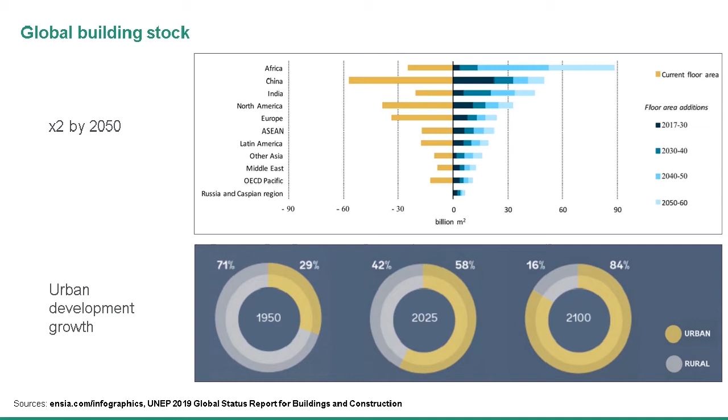Right now, about 52% of the world's population reside in urban areas, and towards the end of the century, over 80% of people would be in urban areas. In this same report, they found that this sector of building and construction accounts for about 40% of global CO2 emissions, and it also accounts for almost 40% of all of the energy consumed annually.

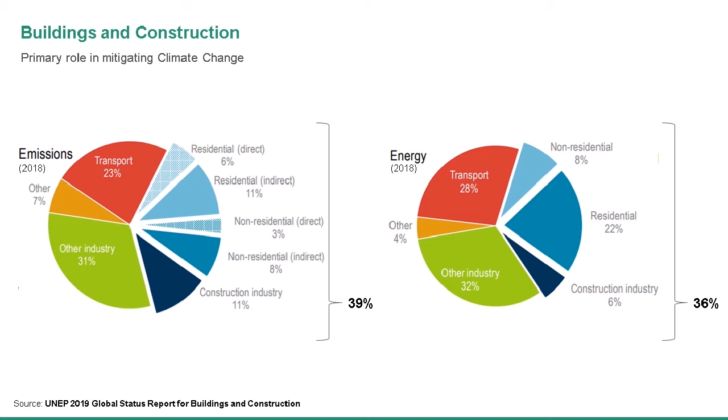Now this is a key point for us. Because of the pivotal role that we play in this sector, we have the unique opportunity to be the catalyst for positive change towards achieving sustainability once we account for all of these things. And what can we actually do about it?

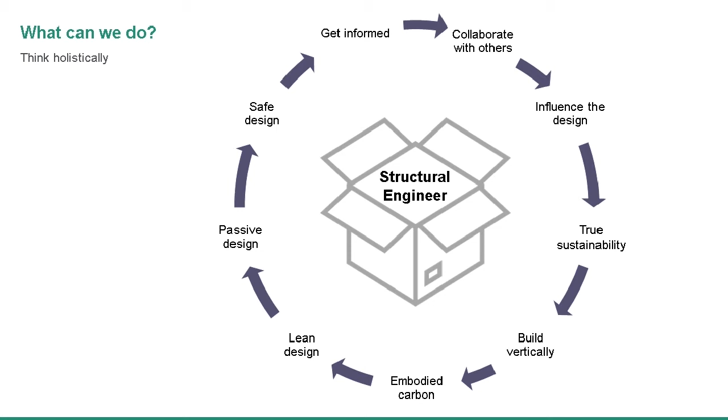So there are a few things that we should be doing. A lot of the presenters in our conference spoke about many of these things, and I'll just highlight a few others. The first is thinking holistically. We need to step out of the structural engineering box, or at least open the lid. We need to consider other factors and incorporate all of these into our thought processes.

First is designing for the future. This is a meme that I got from a friend of mine earlier in September, and it says, if you're not in the path of a hurricane, one will be assigned to you shortly. The image below is a satellite image of the Atlantic region from the National Hurricane Center that showed all of the active tropical systems, storms, and hurricanes across the Atlantic at that given point in time.

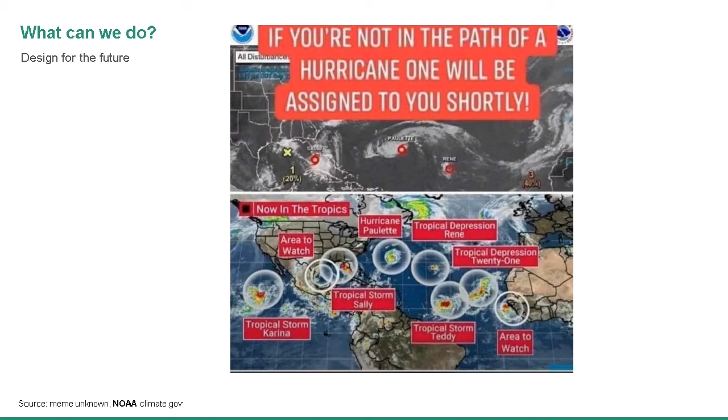What we're finding is that possibly because of increasing ocean temperatures, we may see more and more of this being the norm. This is the second time in history that we've exceeded the named hurricanes for the Atlantic, and so we're now into Greek letters.

So this type of failure is something that should not happen. We should design structures so that they don't fail. And I don't mean over-designing structures, but more careful thought and analysis into what sort of loads the structure would actually be sustaining. Because of climate change, as you get closer to the equator, you'll have an increase in design wind speeds. So account for that in designs and in retrofits of structures.

And then also try to adapt your designs towards the actual impact of climate change. What do I mean by that? Consider, for example, a critical facility like a hospital that's located in an area that's now going to be a potential floodplain for some times of the year due to increased precipitation or rise in sea levels. So let's say you don't utilize the ground floor level for operational space.

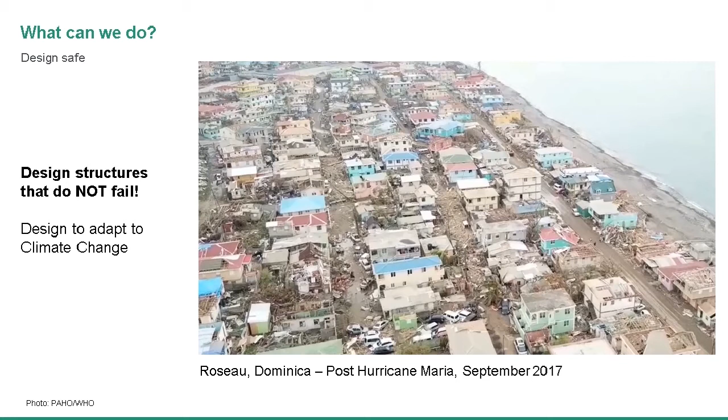Use it for parking in normal times. And then consider that you have ramps that you can access the facility from first floor level upwards, and that facility can remain off-grid and functional for a period of 5 to 10 days, for example, so you can continue to provide essential services. That's a type of thinking that we need to adjust to in order to meet sustainability needs. Then the other thing is passive designs.

Now, some people also spoke about natural lighting. It's incorporating all of the natural elements we have around us, and many of you may already be using it partially in your designs. I'd like to bring it more to the forefront of your conceptual design process. So think about natural lighting, natural ventilation, the thermal mass of building properties, and how you can reuse, recycle, or harvest rainwater. By doing that, you're less reliant on man-made products, and you become more sustainable because you're not taking more resources out of the environment.

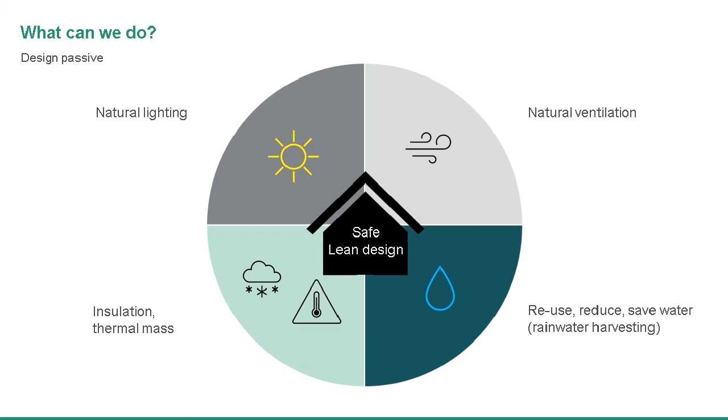A simple illustration: say you were to consider the balance between natural lighting and the heating or cooling load of a structure. Scenario one is where you have a room, say a conference room, that has no windows. You can artificially light the space. And all of us already thinking, well, that's not very green because it's very carbon intensive for the operational load.

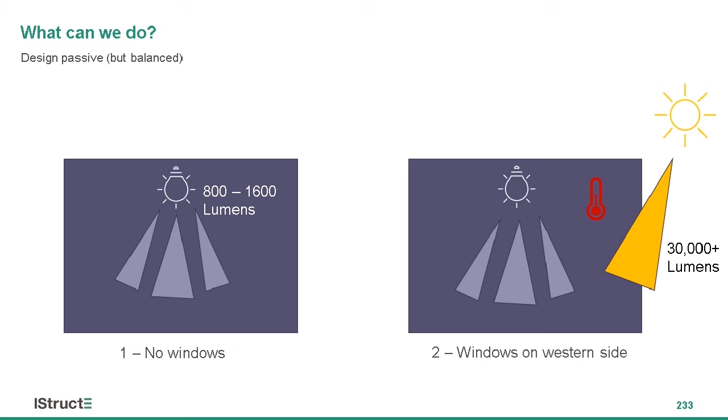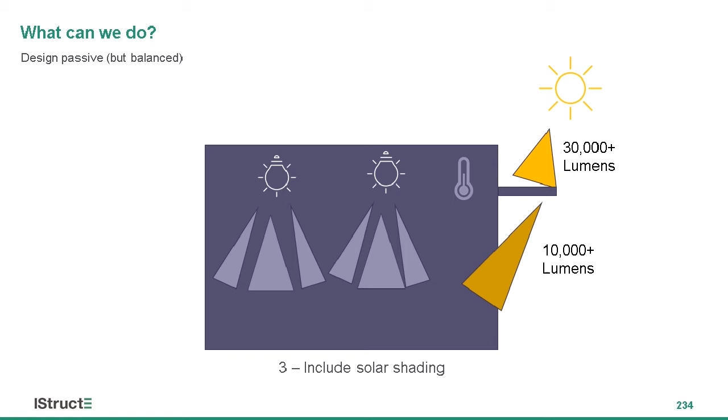Then you can introduce windows or full height glazing, say on the western face of the building or on the roof, like we saw from Steve's slide. But that then tends to bring a lot of solar radiation on the structure, and then cooling loads become a problem, especially with increasing temperatures. What we can then do is incorporate passive solar shading elements. So you're reducing direct solar radiation onto the structure. You still get the benefit of ambient lighting, and you have a reduced cooling load. So it's a more optimal design.

The other aspect I want to raise is how can we use land space more efficiently? I did a couple pro and con points comparing suburban low-rise spreads, say single or two-story structures for residential development, versus medium-rise, 10 stories or less, in an urban development. The suburban spread would utilize considerably more land space. And the Food and Agriculture Organization of the UN has made a direct correlation between increasing global population and reducing arable land space. Now, food security is already a problem for many countries, and with this increase in population that we're expecting to see, this problem is going to be exacerbated.

So by us as structural engineers influencing our clients to utilize less land, we'd be helping to alleviate this potential problem. The other thing is, from studies of healthy cities, it was found that people who live in urban environments tend to be healthier than people who lived in the suburbs. Why? Because from urban environments, you tend to walk more. You can leave your apartment complex, walk to work, cycle, take public transportation, access amenities around you. If you're in the suburbs, you tend to jump into your private vehicle to get to your office or otherwise. So this is another big consideration.

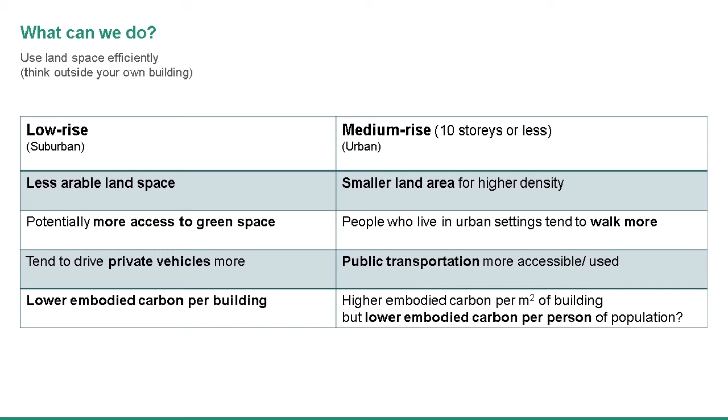And I think one of the other trends we need to probably switch to is considering the overall embodied carbon in an urban medium-rise development versus, say, suburban or individual houses. Because yes, the single or two-story structure would have less embodied carbon. However, if you were to house more people in an urban development, your infrastructure towards that space is also probably a lot less. So your total embodied carbon for that development, or the embodied carbon per person, would be a lot less than the suburban spread.

And then the concept of true sustainability. Speaking from a developing country perspective, we need to start building simply. We're probably doing that already, but if you're proposing solutions in countries like Africa, the Caribbean where I am, or Latin America, don't propose solutions with bespoke materials and connections that are only going to be used for your project.

Consider projects that can be done utilizing local labor and have the transfer of knowledge, so you have the spread of sustainability. You want to be able to replicate your sustainable solutions so that the communities can use it after your project ends. And then also consider ease of maintenance.

We tend to have a systemic problem of lack of planned preventative maintenance. This is where you should use materials that are more durable. You should consider if you have local capacity to execute planned preventive maintenance, and make it as simple as possible. Because the photo you saw with the damage in Dominica, a lot of that can be attributed to lack of maintenance in many of those buildings.

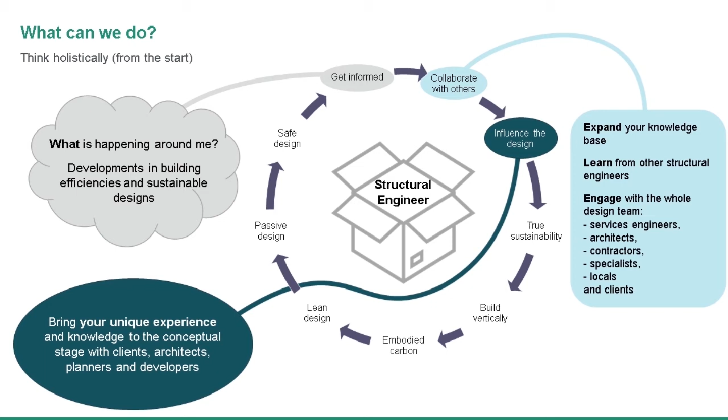And then use all of this knowledge and experience. Use your critical thinking and your creative mind, and influence clients early on in the project. This can actually change the future of sustainability. In order for us to achieve something different, we need to start doing differently.

Thank you, Shalini. Yeah, absolutely brilliant. A completely different point of view again. Shalini's clearly not just a structural engineer, but very much in the position of having to be a multidisciplinary designer all of the time, and therefore a multidisciplinary influencer.

And I think there's so much we can all take away from that on projects small and large. Don't be afraid to ask the question, even if you have to preempt it by saying, of course it's not my discipline, but why have you put the windows on this side, for example? And I really like the point about questioning and understanding where you're working.

For those of us who work internationally, and many of us maybe are based in one country but working in others, how well do you understand the sustainability drivers in the country where you're working? Are they the same or different to at home? Is denser better, or is lower better? How deeply have you thought about it?

And I've got to say, if there's one takeaway message for me from those slides, it was to do with the slides on population growth and building growth. It really hit home for me just then that those of us who live and work in the so-called developed world have very little need for more buildings.

Most of the world's growth in population does not occur in countries like the one where I'm sitting right now, and therefore if we've only got a certain carbon budget around the world, then I think we need to talk internationally about who should be allowed access to using that, because there are countries around the world where you need housing, education, more hospitals, and we need to make sure those countries get prioritised.

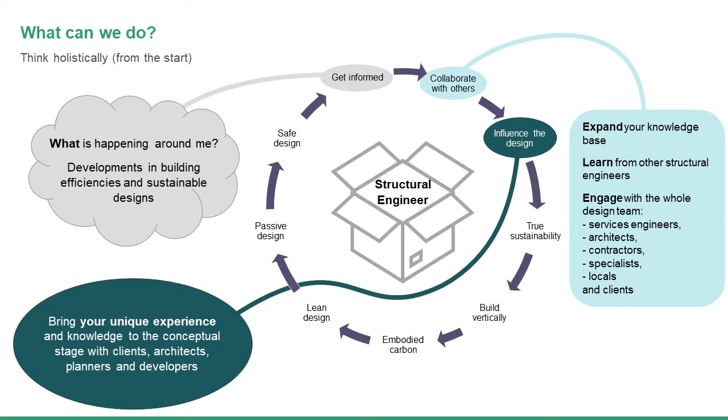Yeah, I mean, thank you to everyone who's sort of spoken already today. One of the delights of going slightly later on is, as you listen to all the previous speakers, you think, oh, that was something I was going to discuss later. So apologies if there is inevitably a level of repetition.

One thing I will say, though, is that in contrast to some of the talks we've heard earlier today, this session is going to involve less of this type of thing, and instead we're going to talk more about how you interact with people and how you can use your skills of persuasion to really influence the brief and the overall sustainability goals of the project. So why does this matter?

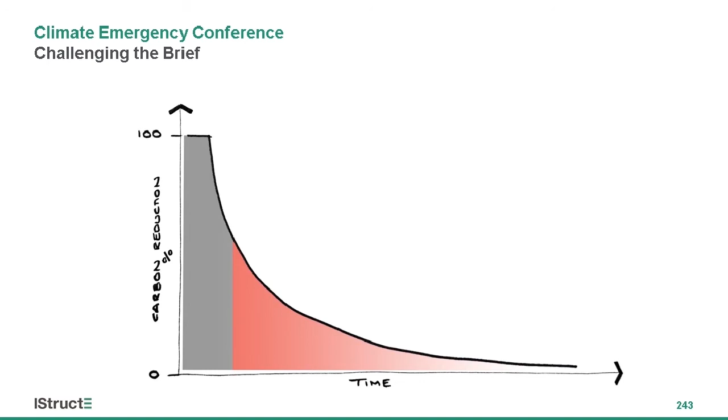So I think this is an important point to ask: what is a brief? That might sound a little ridiculous. Of course we all know what a brief is, but do we? The official brief from the client can potentially be quite loose, fluid, something very malleable. Often it's fleshed out by others who've had involvement before us, potentially without fully understanding the negative consequences of some of the ways they've changed it or conditions they've added. In some cases, we'll undoubtedly be doing the same. So it's really important to distinguish between these two things. Brief versus brief - it's subtle but important.

Because every step of the design and construction process involves effectively a number of briefing examples. I should apologize - as a consulting engineer myself, I often draw things from that perspective, so apologies to anyone on the contracting side listening. But for example, you might receive a brief from the client, an architect, a project manager. You might brief your own internal team, or even the external team. You brief sub-consultants, the contractor with your issued construction information. Every single time you communicate with someone, there is a brief involved. And as engineers, we often see ourselves as problem solvers - our immediate response to these requirements could be how, when really it should be why.

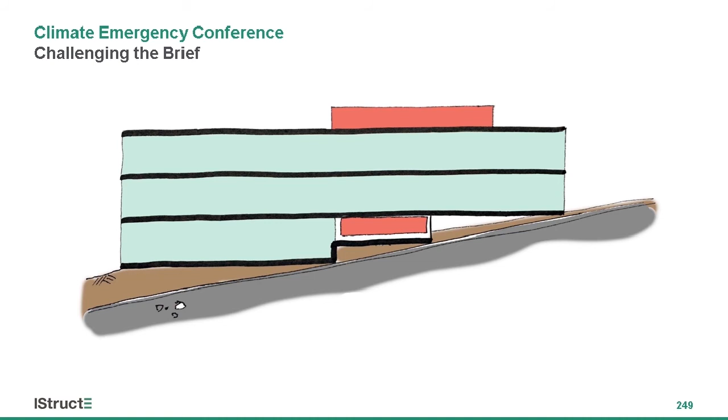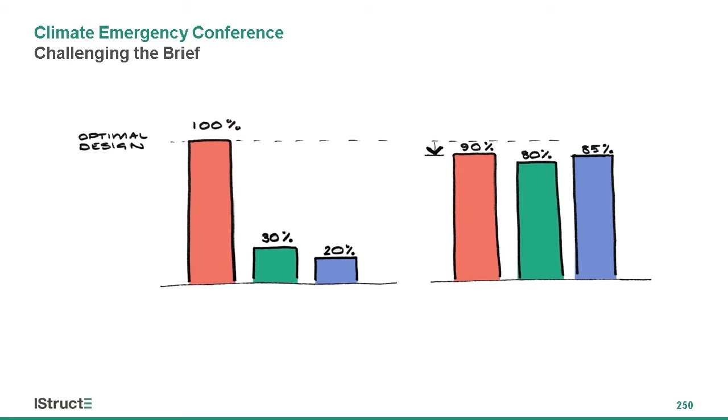Similarly, try and unpick what's driving the decisions of others. Speak their language and show that you understand what they're trying to achieve and that you're jointly working towards that. Everyone wants their perfect solution, but sometimes one party writing that in stone comes at significant cost for all the other disciplines as they try and work around it. If we can really get to true collaborative design and compromise, we might not get exactly what we individually want, but instead everyone gets close - 90% of the optimal architectural layout, 80% sustainable structure, 85% of the most energy efficient building services, and so on.

It doesn't really need to be at a global level either. This, I think, is similar to an example that Maggie referenced. I inherited a project where the architectural team had requested a flat slab, exposed concrete soffit, but it wasn't really the optimal column arrangement for a flat slab. Digging a little deeper, it turned out the reason they wanted this was they wanted the slimmest structural zone to create the feeling of height in what was quite a restricted space.

But all the lighting and acoustic treatment would then need to sit below the slab and encroach on the space below.

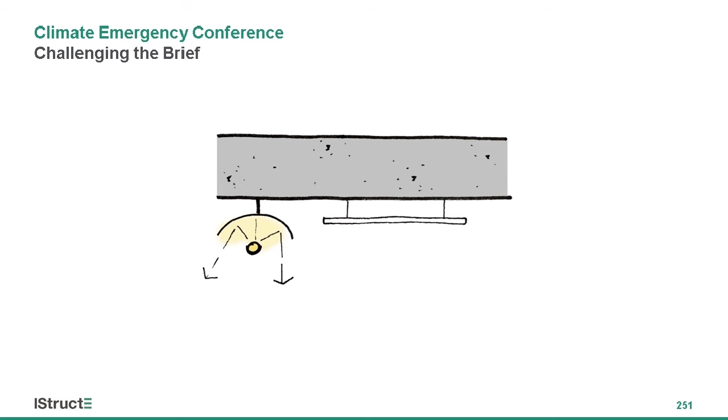Whilst the 300mm flat slab did give them the shallowest structural zone, it didn't seem to give anyone what they actually needed. So we worked up a ribbed slab proposal, and it wasn't the shallowest, but it allowed the lighting and acoustic treatment to be recessed into the coffers. It even helped with the air extract positioning. And more importantly, it allowed for a 45% reduction in concrete volume across the entire floor.

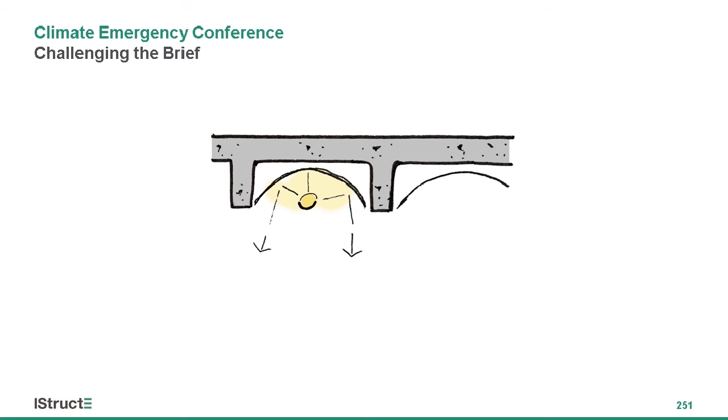So, like Maggie's example, it's a simple change, but a big win, and it just came from challenging that requirement we'd been given by the architects.

When you're assessing solutions at the early stage of a project, and looking at various options, don't just respond to the constraints of the brief. Give positive suggestions as to how it could be tweaked or improved to make more sustainable options work. And don't be afraid to think radically.

Could you move something like a large open space that needs a heavy transfer structure from the bottom of the building up to the top, where you could avoid having that transfer structure altogether, even by tweaking the column grid? And I think the important thing is confidence.

Often we as engineers will wait to go away and fully check something before raising it with the rest of the design team. But don't. Share those ideas and gut instincts, because the longer you wait, the harder it will be to change other people's minds. You might not be able to influence this every single time, but let's be honest, this is hugely important, so even a low success rate is better than none.

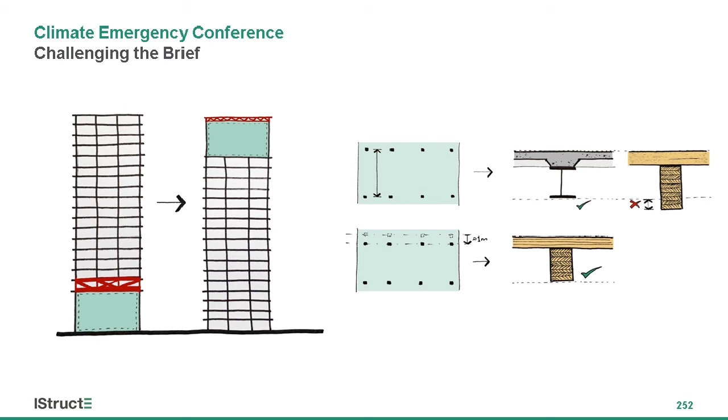Use tools and techniques to communicate the scale of the benefits - comparisons with volume, weight, car trips to the moon and back. I quite like the idea of a lifetime carbon use comparison.

I had a project once - a fantastic project, a massive cultural centre, famous architect. The design team were confused as to why we, as engineers, were talking about the key building components but were also keen to discuss the man-made hill, which you can see on the right-hand side. It doesn't really look like much on a section, but when we showed them this, they immediately understood this hill was a significant engineering undertaking in its own right.

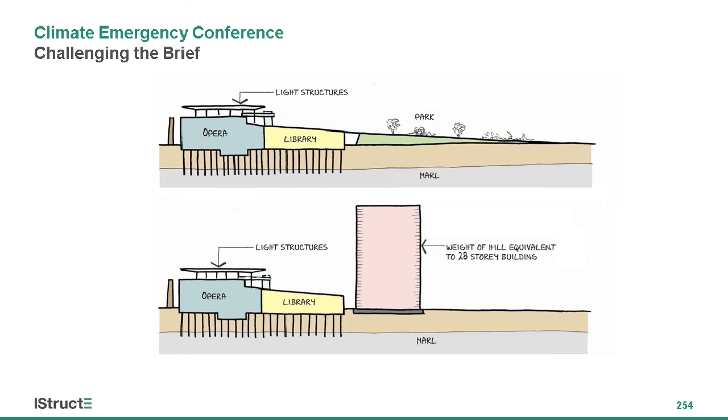Whilst this sketch was to illustrate some of the other structural challenges, it also highlighted why we were keen to find and explore more sustainable solutions for its construction.

We've focused a lot more on creative design issues so far, but on every single project there are inevitably quantitative requirements woven into the brief. For us as structural engineers, often the most significant of these is live loading.

To achieve that 3 kPa, you need to put 29 people in just under 7 square meters, which is cozy by any standards, let alone in the current socially distanced world. And 5 kPa is impossible without really getting to levels of contact that I don't think you'd see outside a rush hour tube train.

With load requirements, particularly for speculative offices, you can often get into a game of top trumps where the higher the number, the better. But even spaces like libraries only have a loading requirement of 4 kPa.

So highlight to a client and a design team what those loads really mean. What are the potential environmental and cost savings if you could actually pare them back? Can you use first principles to more accurately define these loadings? It's something we've already heard about today.

Sticking with libraries, there's often still room for maneuver even when dealing with the limitations of the code. When is a library not a library, I suppose? It might be a library in name, but especially in modern libraries, a large proportion is really more like a reading room with limited, if any, book storage at all.

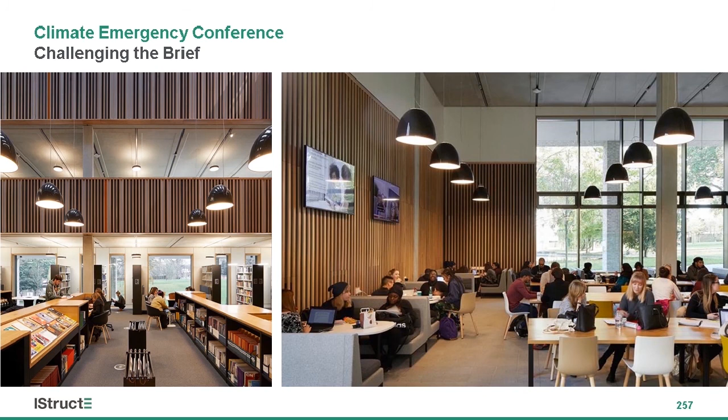And if there is a real need to incorporate higher loadings, then treat the lower general case as your baseline. Work out where the best place to put these higher load capacities is. Can you achieve that necessary area, or close to it, using areas of the floor plate that have already got some sort of latent structural capacity?

If you think about a concrete flat slab, the desire and practicality to have a uniform thickness means that some areas might be able to achieve this with only a marginal increase in reinforcement and therefore embodied carbon. So shorter spans or internal spans adjacent to the cores.

Try and let the structure guide the design and inform the layout that others are working around. Natasha spoke about this earlier. We talk about flexibility, and for a long time we've been advocating the need for a long life, loose fit design, building in that flexibility at the outset and avoiding the frustrations that anyone who's ever tried to repurpose some of the hyper efficient buildings constructed in the 70s will be able to appreciate.

None of us have a crystal ball, so rather than a brief requirement to design for a myriad of potential future requirements, all of which will have an inevitable increase in the embodied carbon, why not design on the assumption that the building may need modifications in the future?

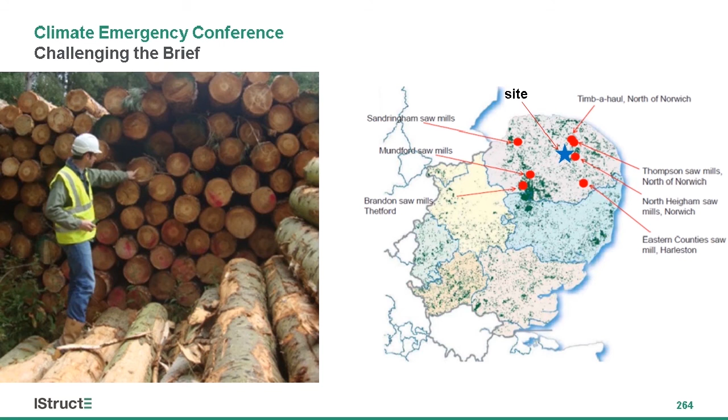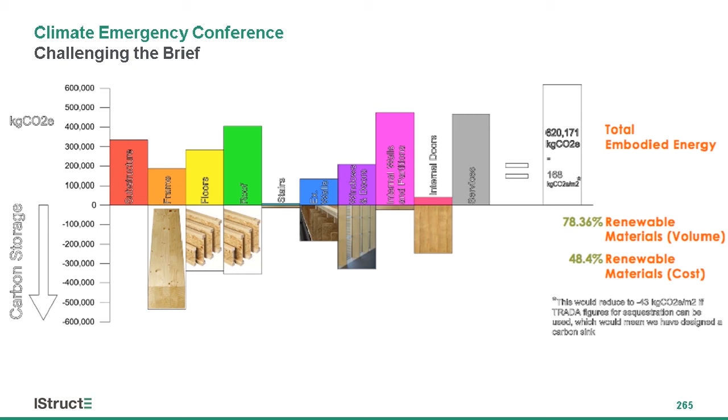In the end, a large proportion of the timber used was sourced from the local area, which not only ensured that the project had broader societal sustainable goals, but also that it was able to achieve a huge reduction in embodied carbon. We used nearly 80% renewable materials, and the final numbers were 168 kilos of CO2 per metre squared, which for a building this kind is fantastic.

So I suppose in summary, it's really just to highlight that influencing the brief isn't limited to concept stage. Challenging the brief you're given and what you communicate to others is really important all the way through. Build a rapport and step outside your own silo. Understand what's motivating the others in the design team and build your case to change their minds. Small changes can have big gains. Be proactive in highlighting them.

And quantitative requirements aren't as fixed as they seem. Focus on adaptability rather than flexibility, and really don't forget the specs. And finally, positively influence that brief. Get sustainability written into it and committed to. Thanks.

Fantastic. Thank you, Victoria. That's a really good summary, it's a to-do list for tomorrow, if I've ever seen one, or today, in fact, as soon as we've finished with the conference, but not before. Thank you both, Shalini and Victoria. Really, really wide breadth of thoughts there.

I think you both talk about the confidence to share ideas and opinions, if you think they're outside the role of a typical structural engineer, that's still worth saying. Victoria, you talked about, even if you're not 100% confident it's going to work, it's probably still worth sharing to at least get design ideas on the table. It all harks back to what Mike Cook said right at the start of the conference about this being a global problem and needing global solutions and needing people to really work together. And of course, we can't do that if we're not going to share ideas.